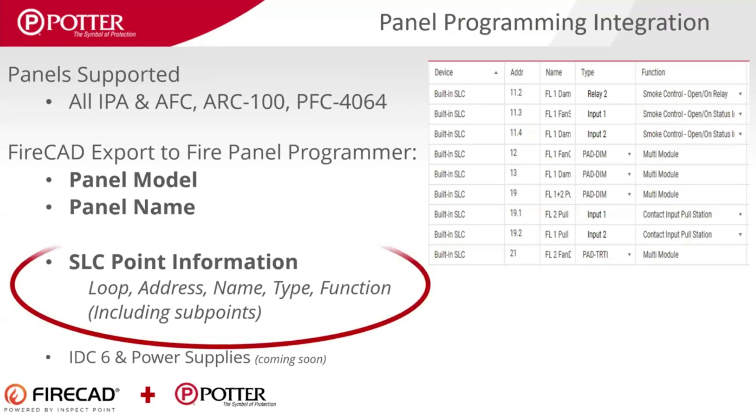With this integration, the panels that are supported are all of our IPA as well as our AFC panels, our ARC 100 and our PFC 4064. With this FireCAD export to the Fire Panel Programmer, what we get is the panel, the panel model, the panel name, and really the big deal here is going to be the SLC point information.

This is where there could be hundreds, thousands of entries that you may have been doing in FireCAD that now need to get eventually into the Fire Panel. All of that information is being transported into our tool, and you'll be seeing an example of that as I go through the presentation.

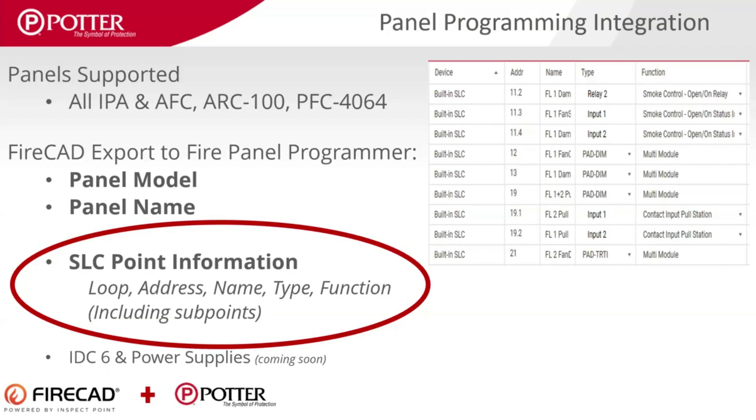You're also going to be seeing some other things from us. We're working on the IDC6 and power supplies, so you'll see that coming soon.

Previously, device information was entered by the FireCAD operator, exported via spreadsheet, PDF, all kinds of ways people were doing that, and then entered manually into the Fire Panel Programmer. Now we're eliminating all those steps—it's a direct import from FireCAD to bring that data over. This shows the simplicity of it, although we will get into the details. You'll find in the latest release of FireCAD there'll be an export Potter data option, and you'll see in the Potter programming tool an option to import the FireCAD file. They'll be going over those details as the presentation goes on.

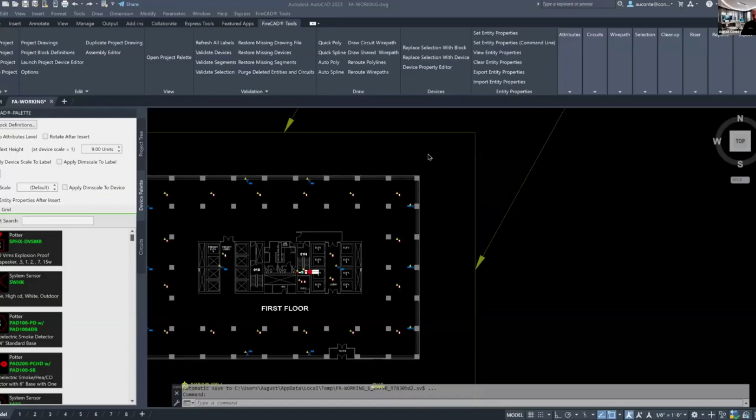With that, I'm going to share my screen and show you FireCAD. I'm sharing an instance of FireCAD that we've already prepared so as not to take up a lot of time with mundane details, and to just show you the functionality of FireCAD.

This will take maybe 15 minutes, and then I'll hand it over to Anthony, who will explain a bit more about getting the information from the FireCAD design drawing into the Potter programming software.

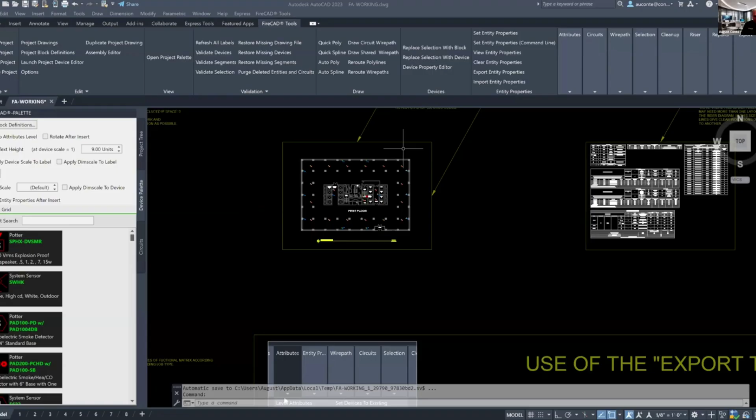I don't know if all of you watching are experienced with AutoCAD, but AutoCAD is the foundation of creating fire alarm system shop drawings in FireCAD. This is an instance of AutoCAD, the main program used throughout the industry for creating fire alarm system shop drawings, submittal drawings, and installation drawings. These drawings are called by all those names, but in essence it's the documentation required by NFPA 72, and therefore by your authorities having jurisdiction all over the country, so they can know that you are planning to install a system that meets the code requirements.

What I have here is a fictitious 3-story program. When you create a set of drawings, it's drawn in what's called the model space of AutoCAD. When you're done creating the system drawings, they're printed out as PDF documents, or electronic PDF documents, that are then submitted to the authority having jurisdiction - that being your fire marshal, fire department, building department, or whoever.

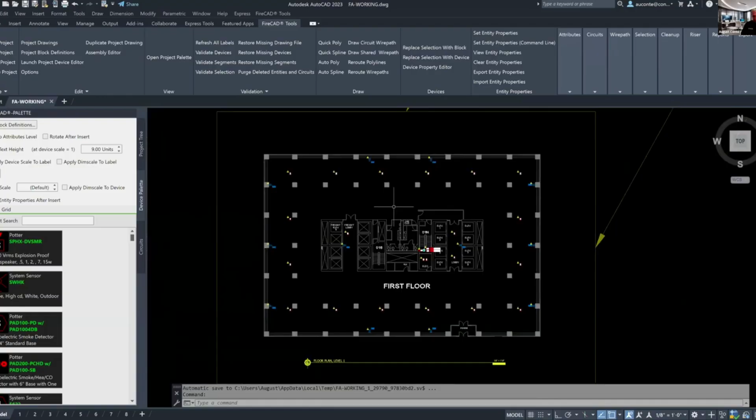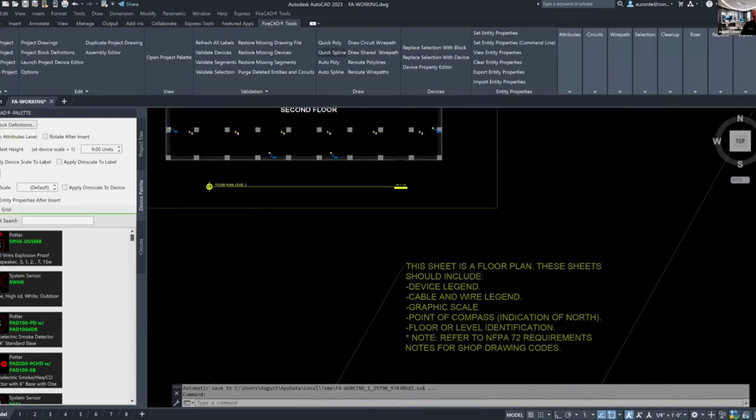So in this building, we're showing the first floor. It's a fictional building with way more elevators than necessary for a 3-story building, but it is fictional. This is the first floor, here is the second floor, and here is the third floor. In the interest of keeping this presentation simple, we have pre-populated icons that show the devices that are going to be used in this system.

Now, in FireCAD we have what's called a ribbon, across the top of the drawing area, which provides all the commands you can use to draw the fire alarm system more quickly and easily. In doing this, we need to have all the components of the fire alarm system shown on the drawing. Let's take a look at what we have here.

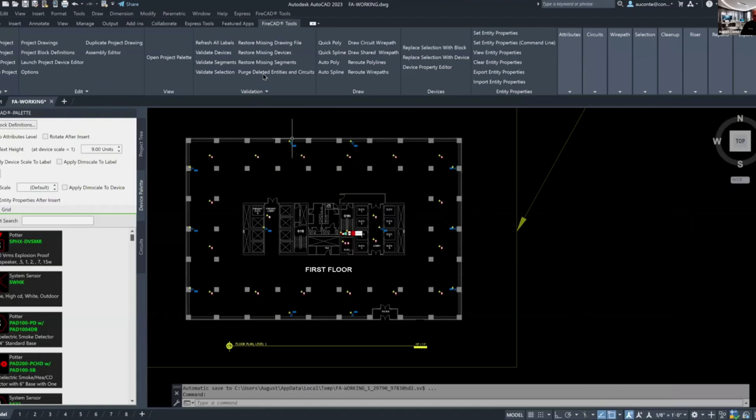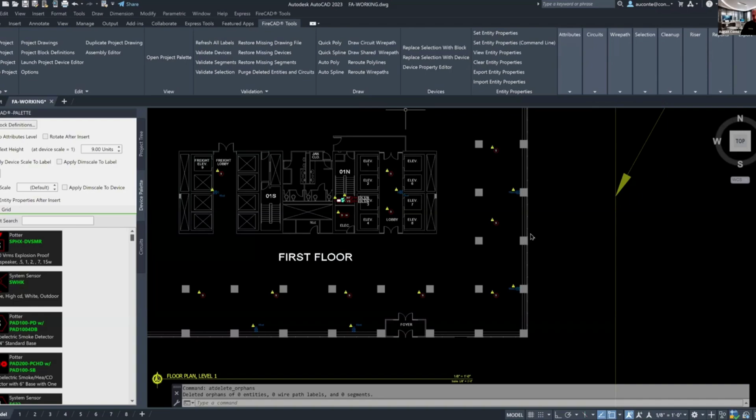The first thing I'm going to do is purge deleted entities and circuits, which gets rid of anything left over from previous operations. Then I'm going to go over to reports and create a device legend. This is something required on the submittal. I have a lot of choices on what information I can include in the device legend - I'm just going to take the defaults set up in this instance and show you what we have.

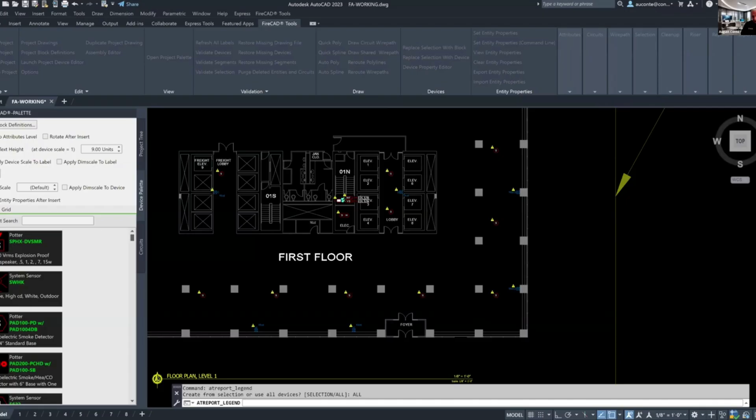So we have a Potter Pad 100 DIM 1, 57 Pad 300s with the 6-inch base. We have one heat and smoke detector, some generic non-branded water flow tamper switches, and 37 System Sensor horn strobes. These are all depicted on the drawings.

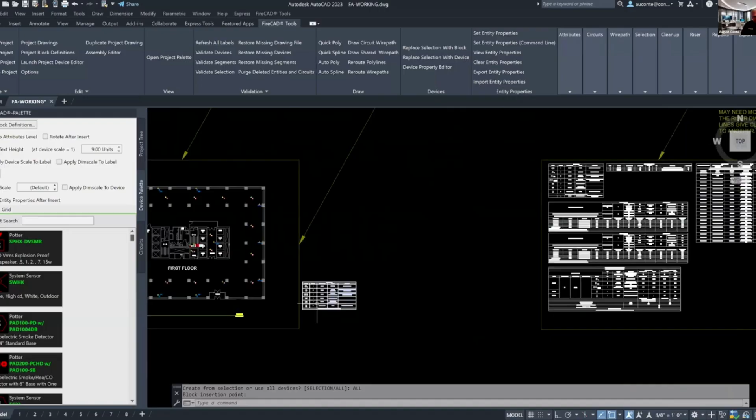This is an example of an AutoCAD object which FireCAD recognizes. If I select similar, it shows me where all these smoke detectors are located. Now, what I don't have - and you may have noticed - is a control panel.

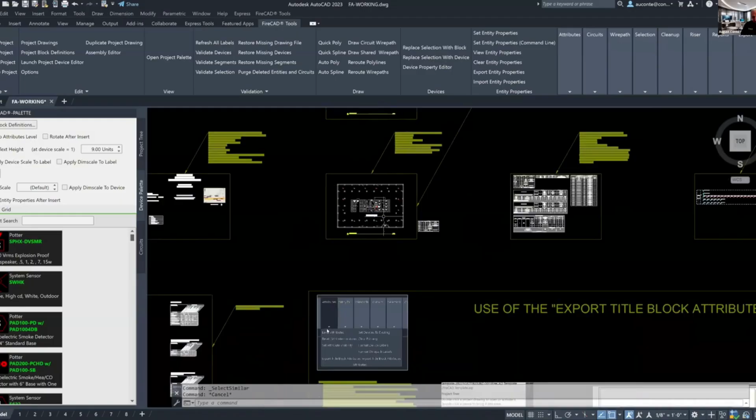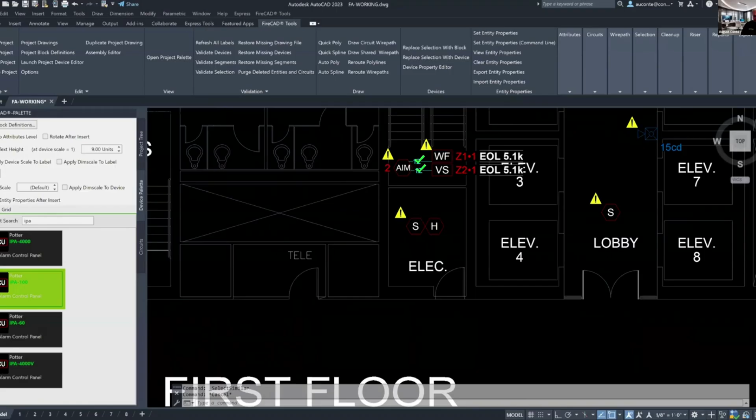So first thing I'm going to do is move over to the electric room on the first floor, and I'm going to choose a control panel. I'm going to type in the search box to find what I want, so I'm going to use an IPA 100 control panel. This is the AutoCAD symbol that represents that control panel.

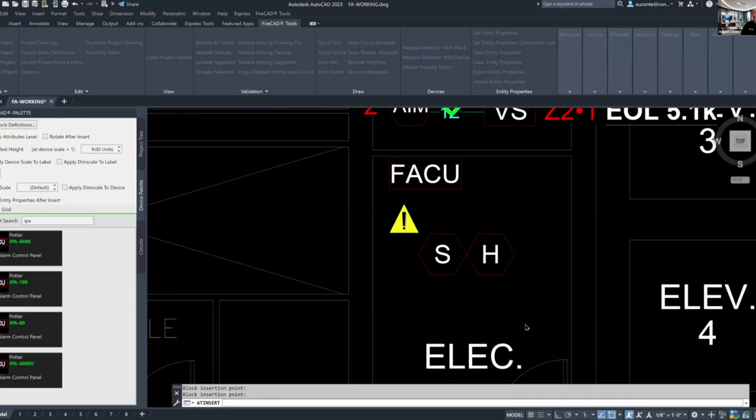I'm going to place it in the electrical room on the wall, and then I'm going to type a name for that, P1, so we can identify it, especially when we have more than one panel. We could have a network system, a fire alarm panel, some power panels, some NAC panels. Each one is given a name, making them easier to identify.

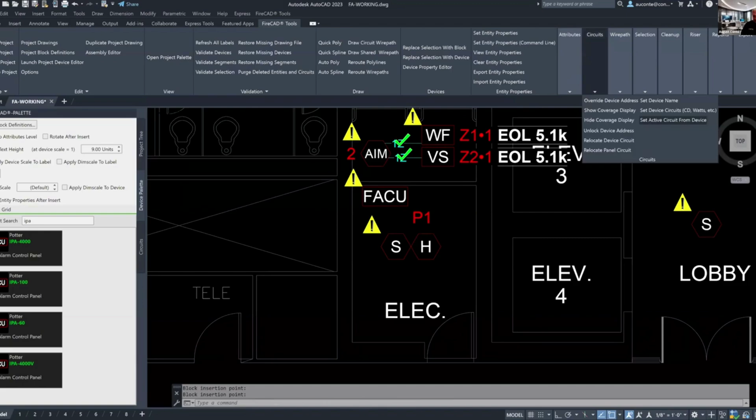Now that I've got this panel on the drawing, it is provided with circuits. If I look at this circuit, I can set active circuit from device, click on the panel, and find out that it has two NAC circuits named N1 and N2, and an SLC circuit named L1, along with the flex circuits that are there.

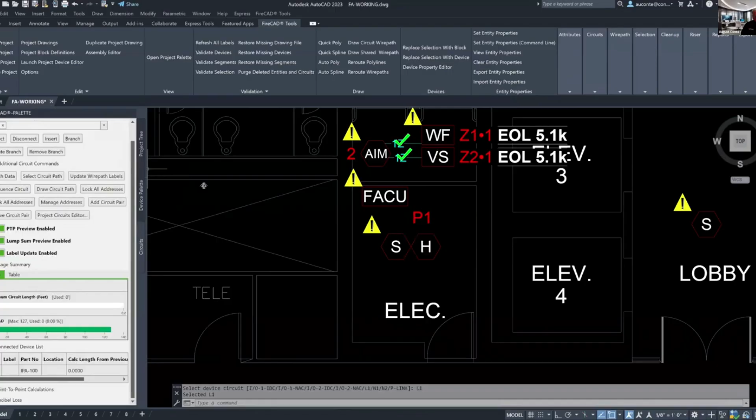I'm not going to use those. I'm going to use the SLC circuit. When I do that, my FireCAD palette, which is kind of our control center that tells us just about everything about our system, switches over to enable me to actually connect to the SLC devices that are compatible with the SLC circuit.

They light up in green. You'll notice that these horn strobes don't light up in green because, as you all know, you can't connect a horn strobe to an SLC circuit.

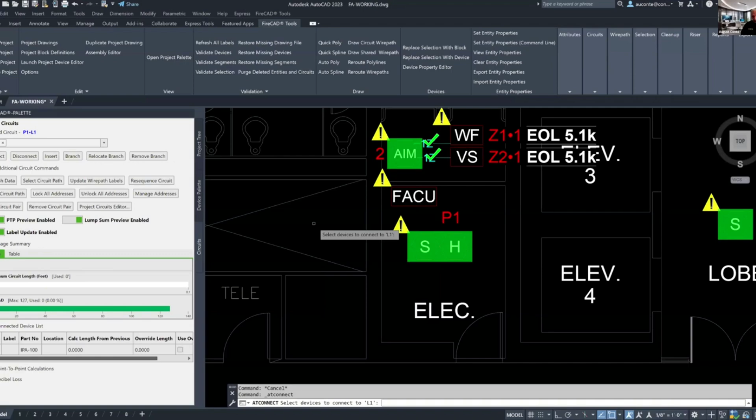So in order to perform the connection of this SLC device to the SLC circuit, I simply left click, changing the shade of the green color, and left click over here, and left click over here, and then I can go up to this point, this point, this point, this point, this point, and so forth.

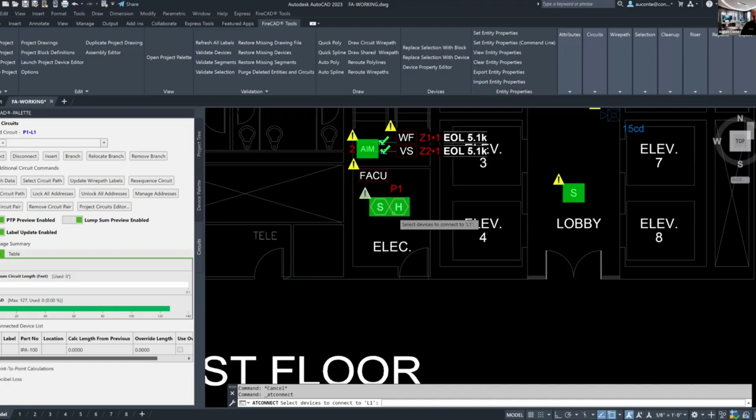Now, I'm not going to bore you by connecting everything on this system, but I'm only going to show you the procedure that is used and how simple and quick it is to connect all of the SLC devices on this circuit or on this floor. And look at that.

By connecting them, they now get addresses. So these addresses are the ones that are assigned to these devices. You, of course, control that. And when you make these connections, the attribute of the AutoCAD block displays the address. In this particular case, it includes the name of the panel and then the SLC circuit and the address, which is the address transmitted eventually to the panel programming software.

So when I select this device, I then can right-click using an AutoCAD feature to select similar. And I can say, you know what? This is a little too much information. I don't want to display P1 because there's only one panel.

So I go up to the attributes command and choose format device labels. Most of the FireCAD commands are logical. They're explained and named clearly and intuitively. The device name happens to be the panel name, and the card name is something we don't want. And we're not going to use branching here so far, but we haven't.

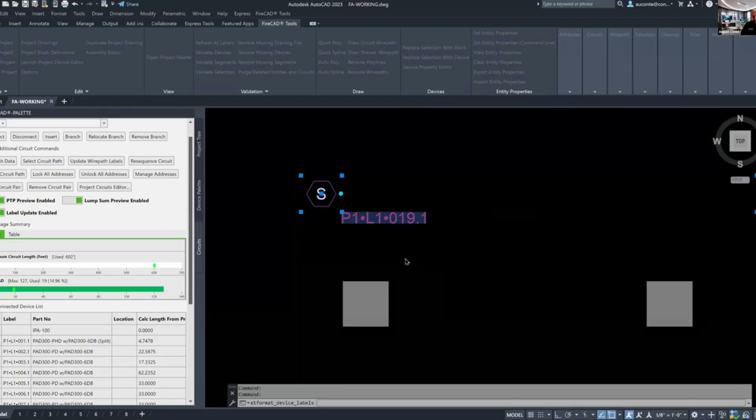So now the names are changed to L1 and detector number 19, address number 19. We started here with 1 and we ended up with 19. And if we look over here, our connected device list shows us that we have these 19 devices. So we have now made connections to the SLC devices.

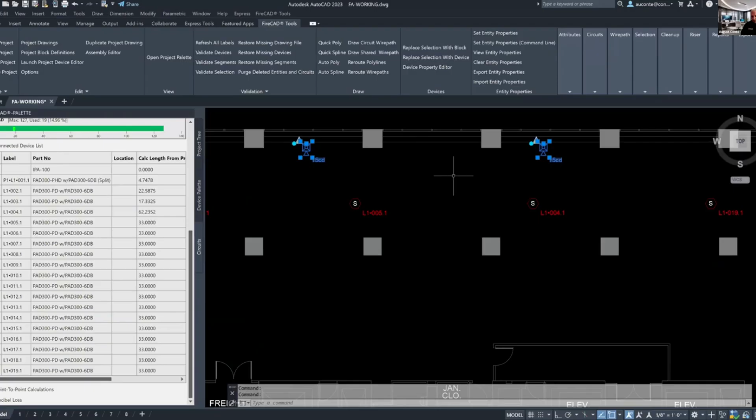Now let me switch over and talk to you about the notification appliances. Here is a notification appliance, and as you can see, it is a 15 candela horn strobe. Now, we all know that you need to size the candela rating of the notification appliance to cover the area that it is located in.

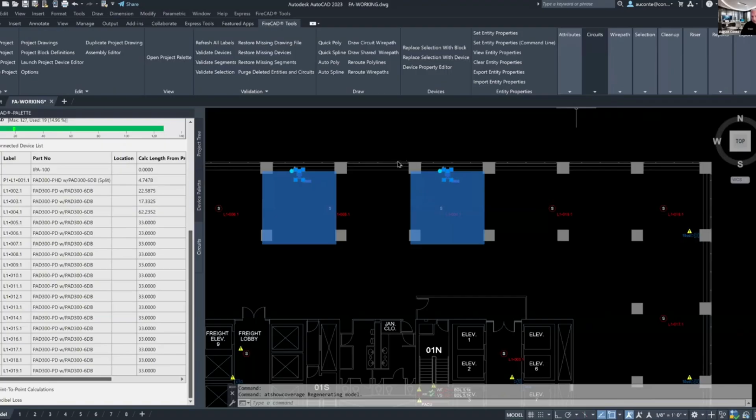So in this case, I'm going to check that, and I'm going to show the coverage display. Well, unfortunately, 15 candela in this large, open area is not going to be sufficient. So we have a tool to change that candela setting, and from this list of settings in the database we're working with, we can increase that from 15 candela to, let's say, 75 candela. Now that we've done that, we can see that we have adequate coverage in this area.

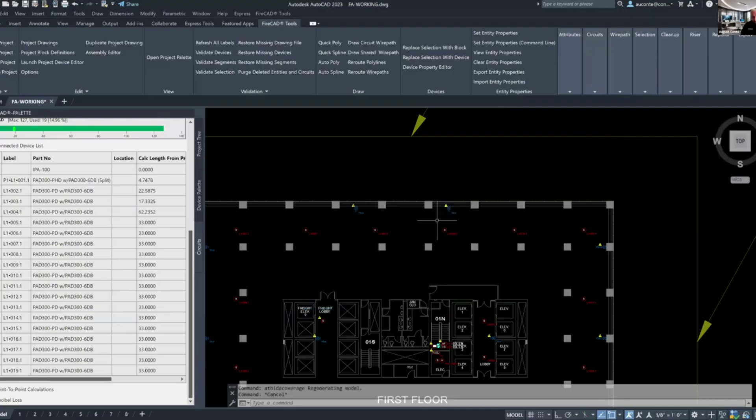Now that we know we have adequate coverage, we hide the coverage display. So now we are ready to take step 2 of our process and connect the notification appliances.

I'm going to go back to the panel, go to circuits, and choose the tool to set active circuit from device. I'm going to click here and choose N1.

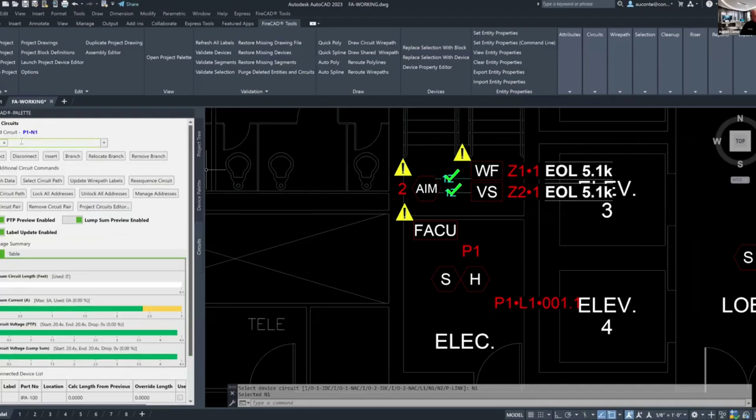Now over here on the left, the program has provided me a selection of P1-N1. It gives me the opportunity to do the same thing I did on the SLC circuit and start connecting these devices. I'm going to go down here and connect these along this bottom wall, all of which haven't been changed from the 15 candela inadequate setting to the 75, but that's okay.

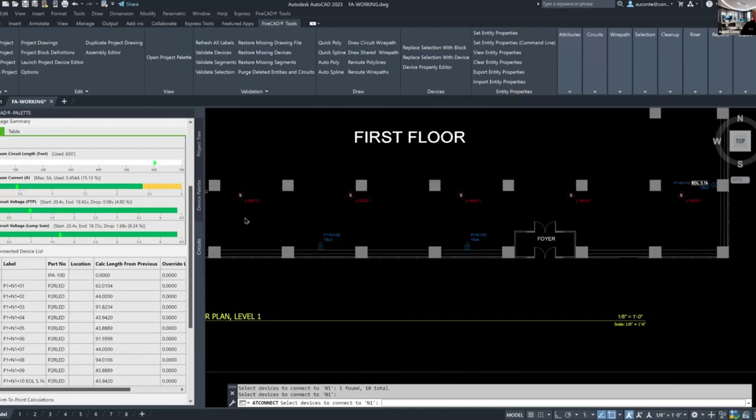I can come back and change those later. Then I'm going to go around the perimeter of the building—these might or might not be too many, but not to worry, because as soon as I right click and make that final connection, I look over here in this list, which is a real-time calculation of the load on that circuit.

It tells me all the important information—the 3 amp maximum capacity on that circuit and how much we're using. We're using 0.454 amps, only 15.13%. You are using the program, which gives you very accurate calculations, and you don't have to wait until you're all done.

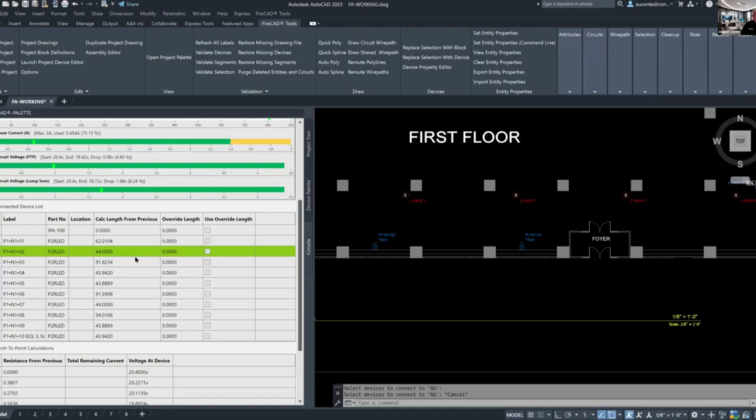It also gives you the end-of-line circuit voltage using 2 methods of calculating, either the point-to-point method or the lump sum method. And this is a listing of what's connected to that circuit, just the same as I had the listing when I was connecting the SLC circuit.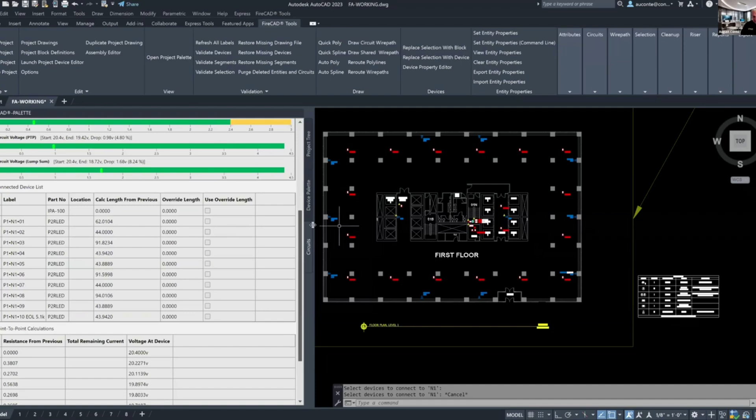So now that I have those connected, I can begin making reports. I'm not going to make a lot of reports because our objective here is just to show you how FireCAD functions and how it can speed up the time required. The traditional AutoCAD method of doing what I just did would take a couple of hours and would be subject to mistakes caused by human error. So this is much quicker in getting your job done than any traditional method.

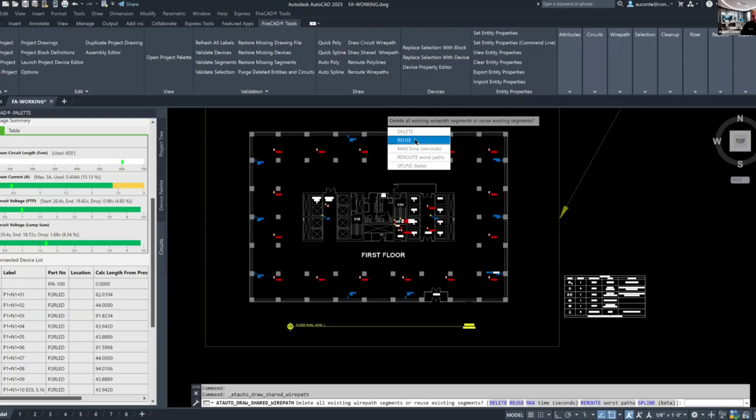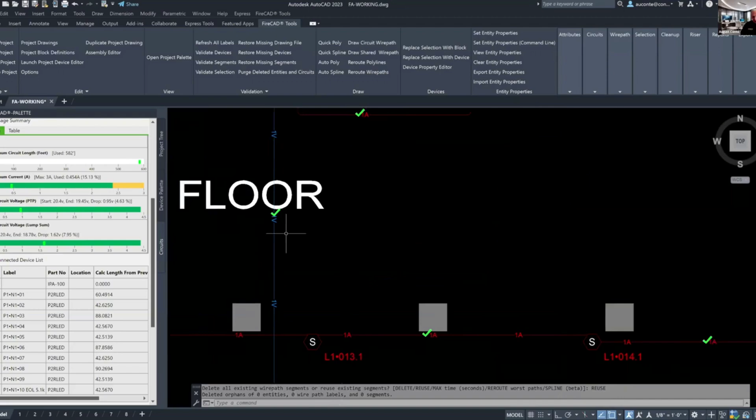The next thing I'm going to do is use this little tool we added, called Draw Circuit Wire Path or Draw Shared Wire Path. When I click that command, it's going to follow the path of where I connected devices, and it's going to draw wireways following those connections. That wireway is provided with an abbreviation which tells you what kind of cable is used for that purpose.

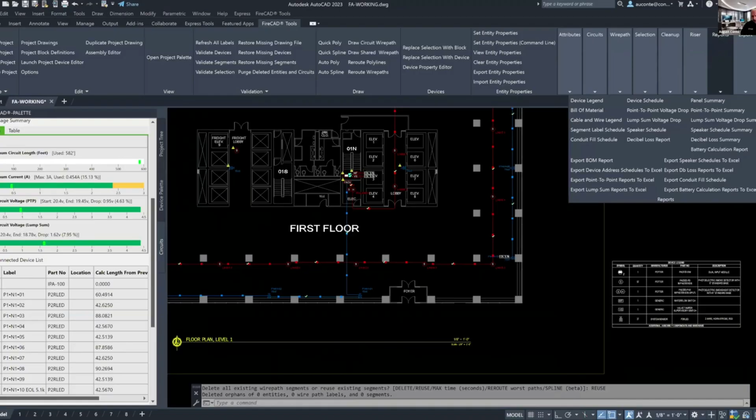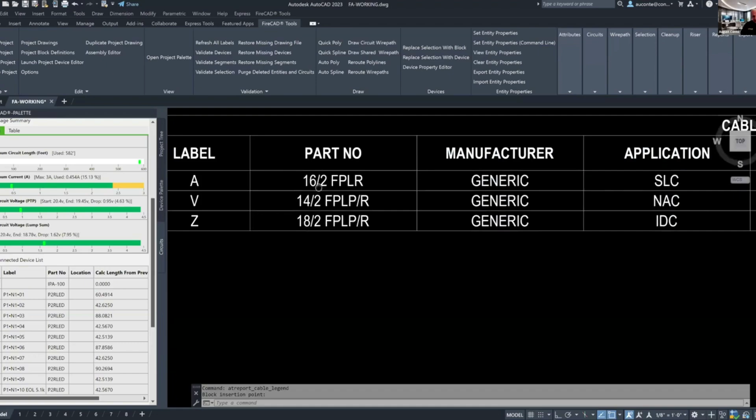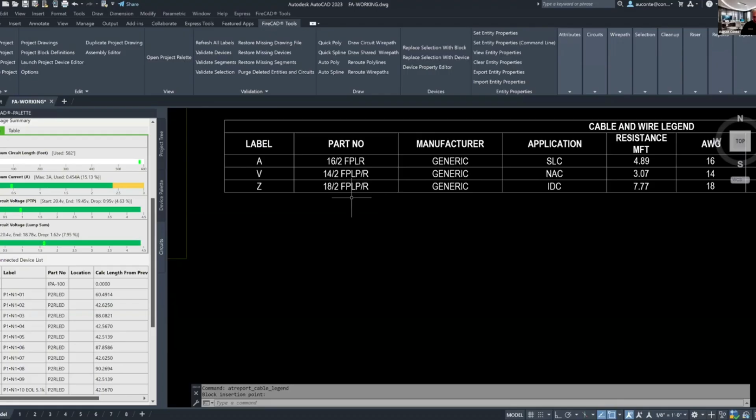In order to show you what wires we're using, we'll generate a cable and wire legend. That cable and wire legend tells us that we have 3 types of cable: a 16-2 used for the SLC circuit, a 14-2 used for the NAC circuits, and for the IDC circuit, which is the connection between the monitor module and the water flow and tamper switches, we're using an 18-2. Any of these cables can be set to be whatever you want them to be.

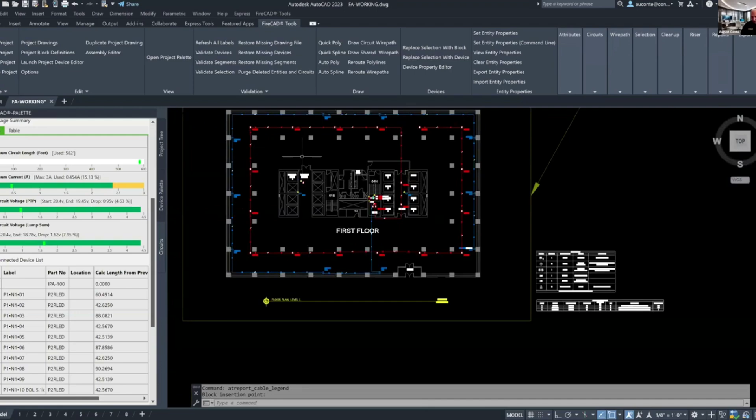So we are now completed with connecting 1 floor of a 3-story building. Reports are instantly produced. For example, let me just generate a couple of reports and then I'll be done with this part of the presentation.

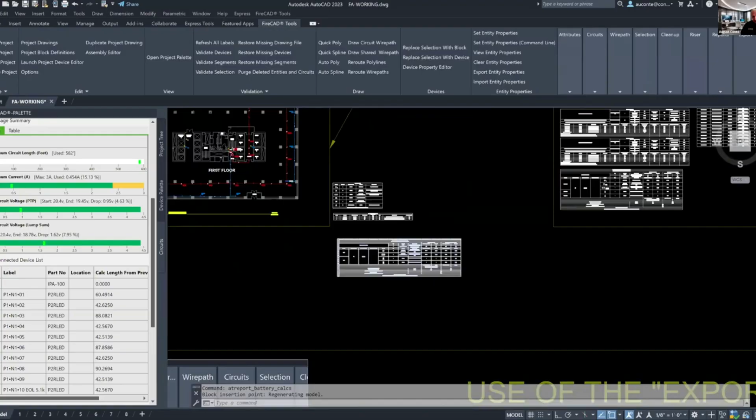I'm going to click on reports and do a battery calculation. This battery calculation format can be saved so that you don't have to change the settings every time you make one. There's your battery calculation right here, and it gives you the alarm and standby requirements down here.

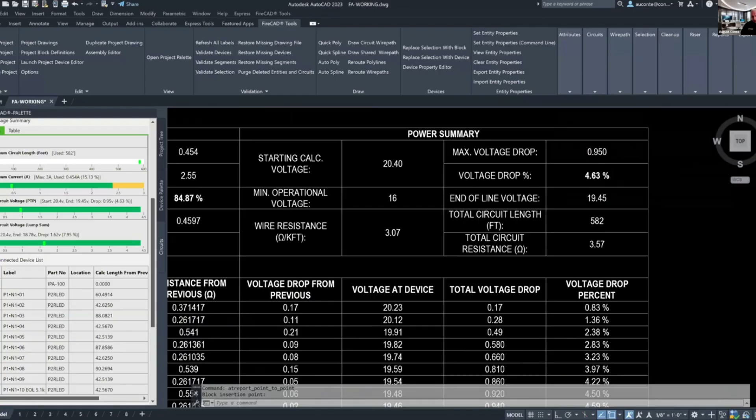I'm going to make another report, one of the most commonly used, the point-to-point voltage drop calculation, which I'll accept the format of and generate. There is your point-to-point calculation using a 20.4 volt starting value and an end-of-line value on the last device of 19.45 volts in this instance. We set a minimum of 16 volts so that you will get a warning if your NAC circuit exceeds that load and reduces the end-of-line voltage below 16 volts.

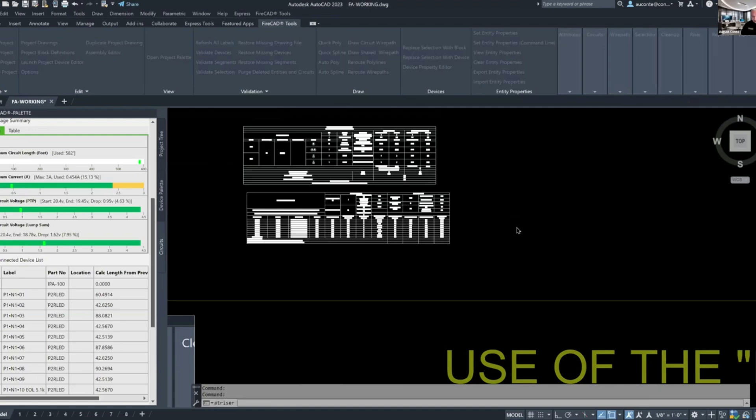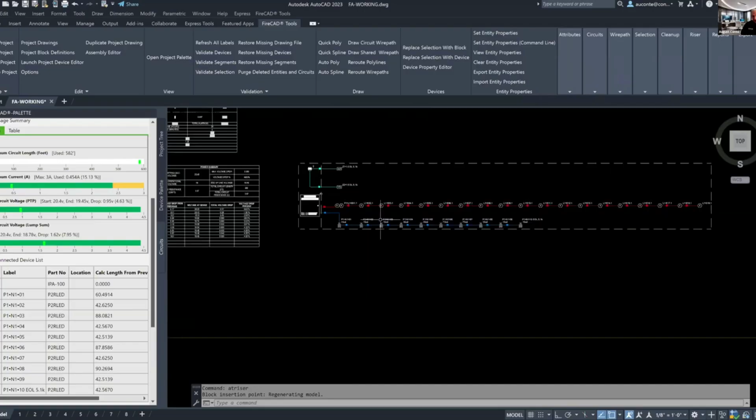The other thing I'll show you, the last of the many reports, is a riser diagram. One of the most time-consuming tasks in creating a set of shop drawings is making a riser diagram and ensuring its content matches the floor plan accurately. In this case, there's never a chance that you're not accurately representing on the riser diagram what's connected on the floor plan.

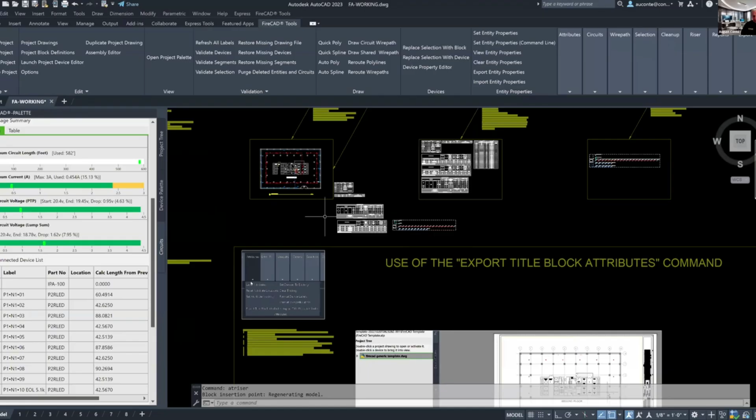So with that, you've seen the basic fundamentals of how FireCAD operates. We have an open invitation to all of you for demonstration and or trial versions of the software. With this, I'll turn it over to Anthony, who will show you how FireCAD can assist you in programming your Potter panel.

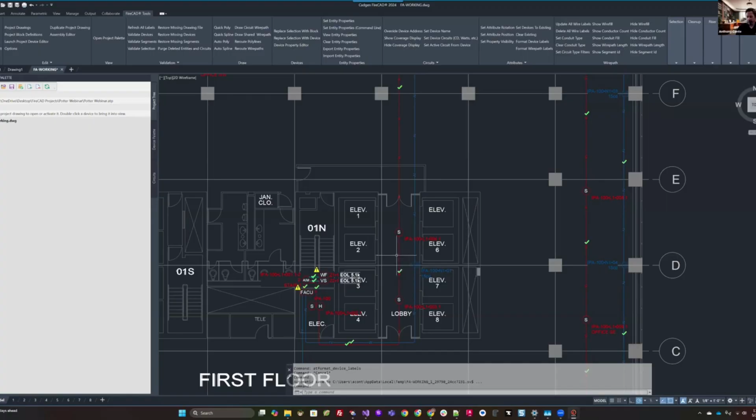Thank you again for that overview. My goal here is to show you how to get all this information over to the Potter Fire Panel Programmer. FireCAD during the design phase allows you to input a lot of information about these parts. Our database has the Potter library, and we keep it up to date. To assist and help populate your point list with information that you'd normally do by hand, we have a couple commands in FireCAD that you'll probably be using on your designs.

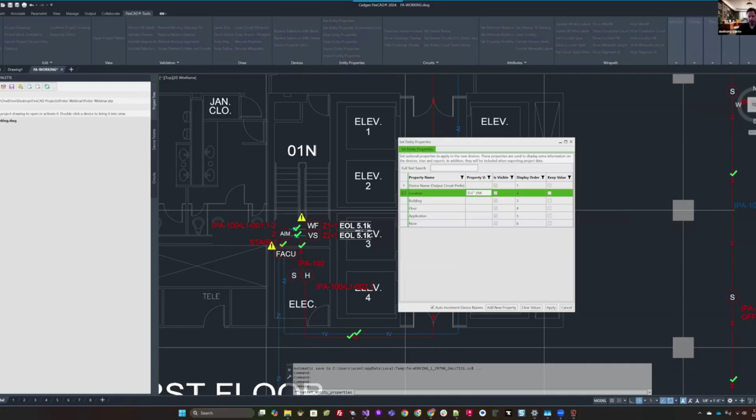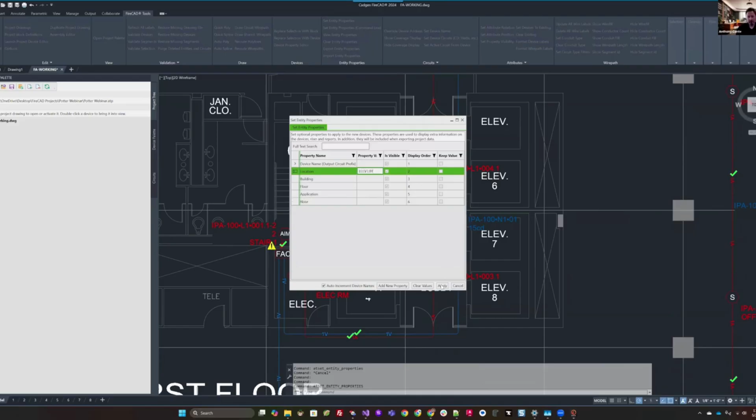Beyond the circuit connection part of this process, we have a set entity property command that lets us add extra information to these devices, such as location. So if I'm going to attach information to this heat detector, smoke and heat detector, using FireCAD, I can put this information into the device and give some location names very easily. I'll do elevator lobby for these detectors, and I'll set a few more here just for our example.

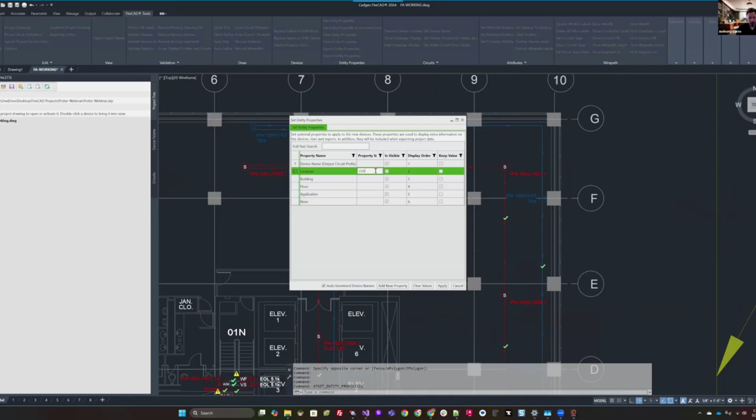The entity properties dialog is something that we've had in FireCAD for a long time, but this information was normally used to export our device point list. We didn't have that integration to export this data. But now that we do, if you're using the program, you're going to want to use location and set that property for the next step.

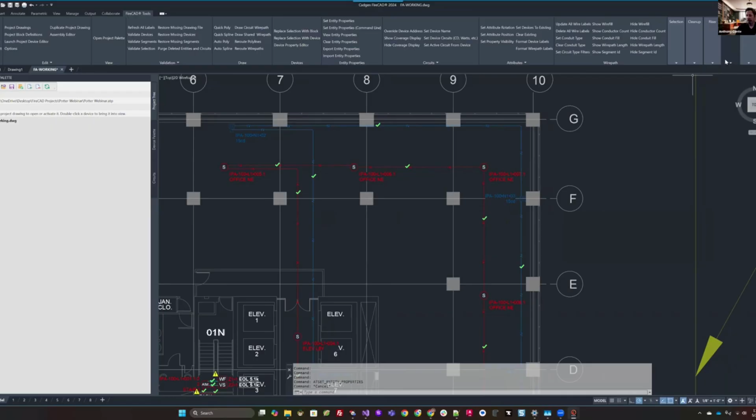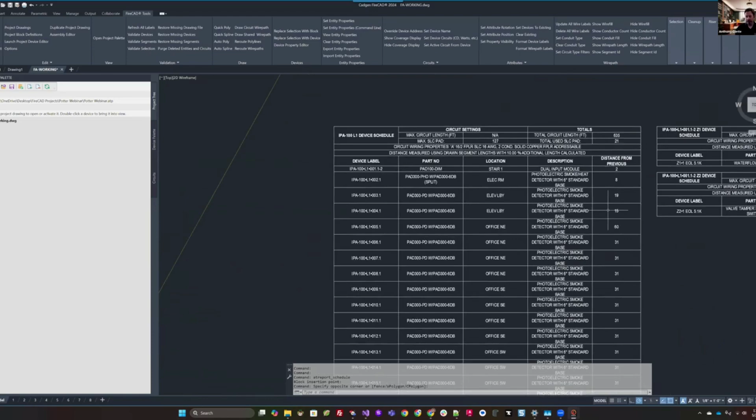Now that I do have locations set on our devices in that same floor plan that August was showing you, this information comes out in two ways. One is, and again the previous way, generating our device schedule, which includes that point list. This would be the manual way of sending this to somebody and having them do the panel programmer.

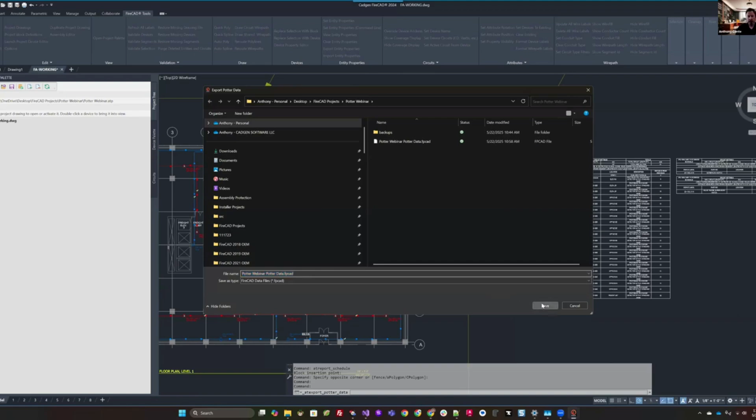However, now with the new functionality, you'll see this export menu up at the top right of my screen, and I have a simple button here, export Potter data. If you make the SLC connections and if you set locations, you're able to export a FireCAD file and save that into your project folder. At this point, what you need to do is take the Potter Panel Programmer utility and simply import that file.

I'll hand this over to Jacob now, who will demonstrate that part of it. All right, so what I'm sharing right now is something you may already be familiar with in the Fire Panel Programmer. Operation is going to be pretty similar here. We go to the File menu at the top, and there is a new menu entry for importing FireCAD files.

So what I'm going to do is select that and choose the one that was exported by Tony. The first thing you'll see here is a dialog window that gives some kind of information for you if there are issues with any kind of formatting, or maybe there's an incorrect function set.

Behind the scenes here, a lot's going on that you're not going to see in this demo for time's sake, but anything that's incorrect will either be corrected with a default value, or in cases where we can't intelligently choose a default value, we would skip the import for that specific point and continue on.

Here, for example, you can see that there are two subpoints, point 2.1 and 2.2, in L1 of this panel. So you could always refer back to your FireCAD project to nail these down. It's just telling you right now that you have these two points set to the default function, and there's a note at the bottom saying the import's going to proceed with these corrections made. I'm just going to go ahead and hit OK.

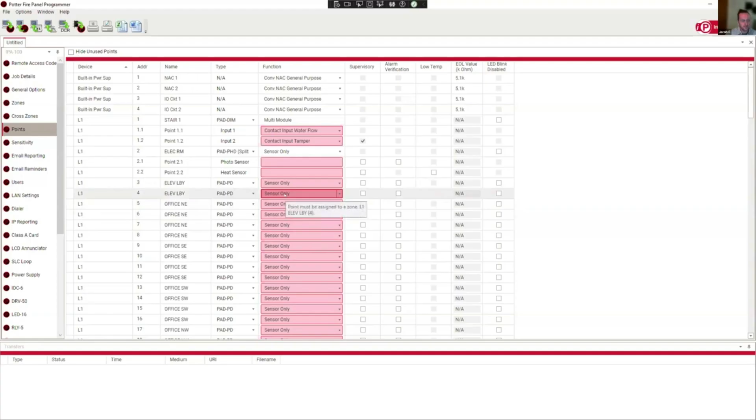Well, the idea here is your next steps as far as configuring your panel program is going to be your zone programming. And that's kind of what these red things highlighting on every single function is going to tell you: hey, this must be assigned to a zone. So you would go as you would for any other panel program. By default, you have your alarm zones, so you can add any number of zones you need to configure.

I'm just going to do one for this demo. And in our window here, I'm just going to take a couple of these points, drag them into the zone programming, and then you will see that you have these that have gone from red to non-highlight, meaning that you have programmed those points.

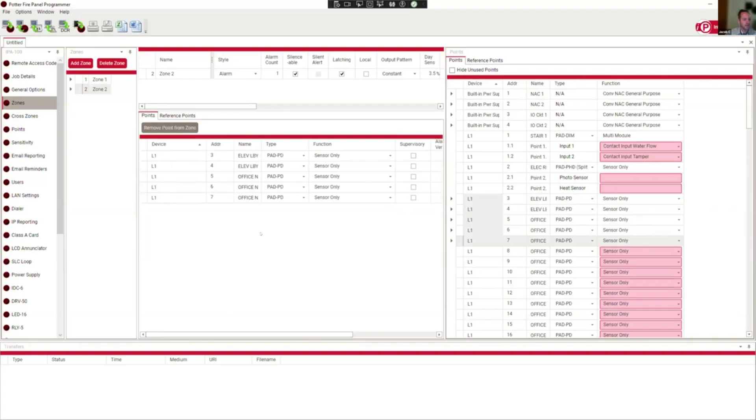And that's kind of the overall process that I'm going to demo today. And then I will hand it back over to Bob Tata for a final little wrap up in his slide deck. And looking forward to hearing your feedback.

All right, thank you, Jacob. So you got kind of an overview of the basics of doing the export out of FireCAD, the import into the Potter program. As I said, Tony and team have released a new version of FireCAD with this export, as well as Potter has also released a new version of the programming tool. So both of those are available.

And really the next thing here, just want to kind of throw this out there. You can answer it today, or we'll be at NFPA, or you're always free to give us a call. But what is next? We see this as the beginning, not the end. Like I said, we met at NFPA and we had customer input, and we think we have a nice first step, but we don't think it's the end. And if we get a lot of response and a lot of interest in this product, you're going to continue to see it expand. So definitely want to get your input on that.